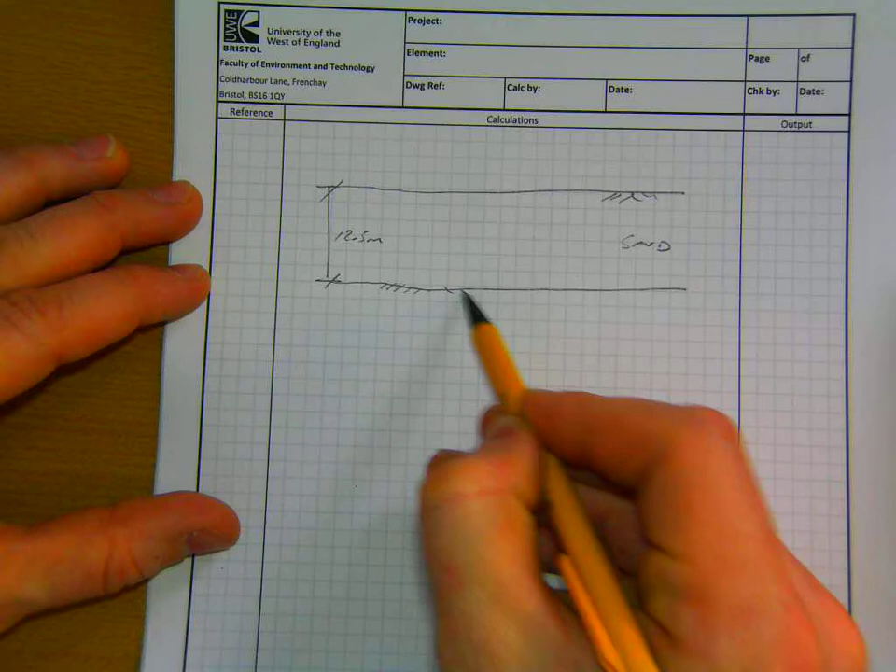So a well has been dug into the sand, and water's been pumped out at some kind of flow rate. The water table would have been higher, presumably up here somewhere. We draw it first, but then we read through where actually was the water table.

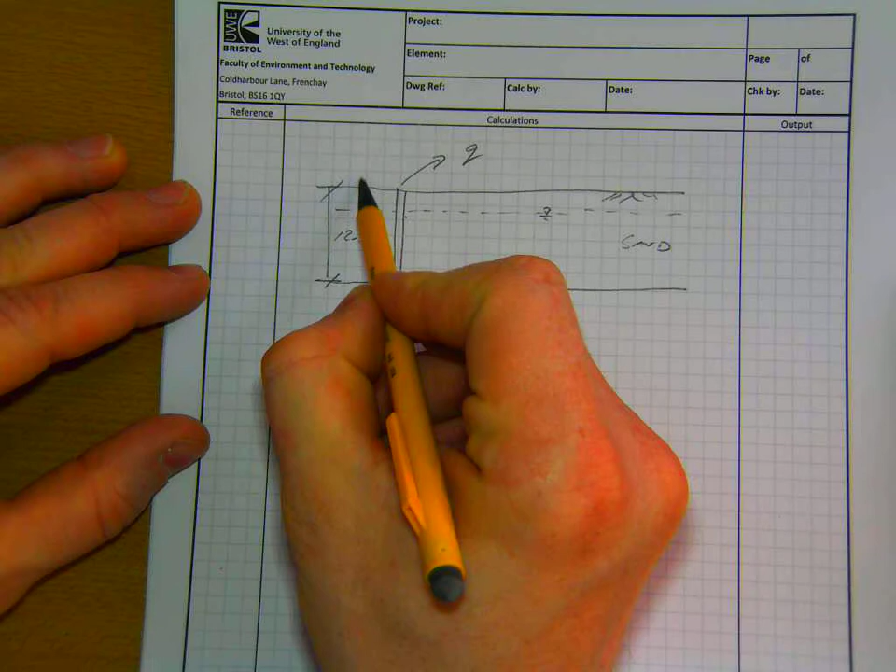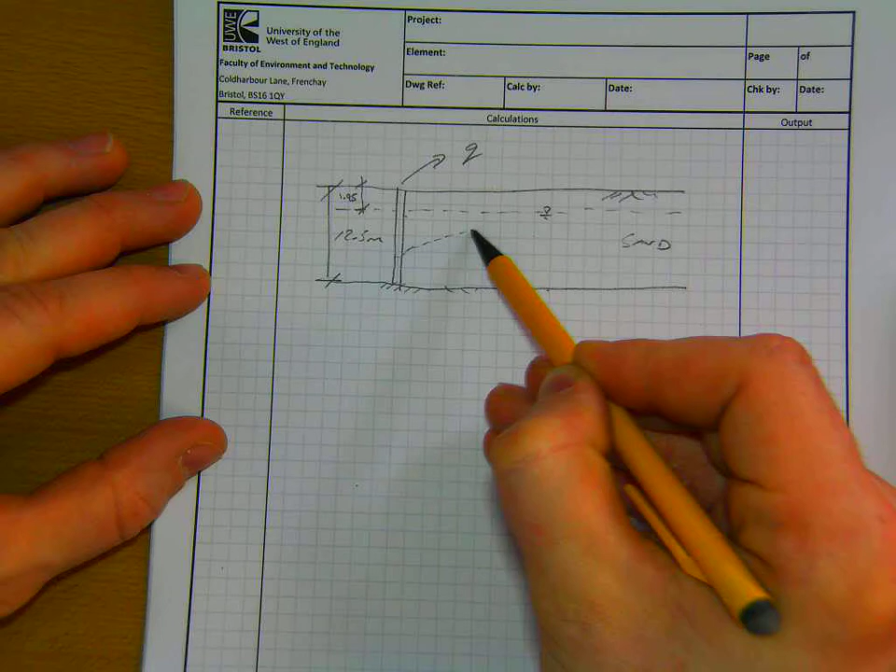It was 1.95 meters below ground level. So there was a particular period of time at the beginning when this water table was at 1.95 meters below ground level. Water's been extracted from this well, and over time that would have pulled the water table down to another level. We don't exactly know how far, but we'll read about that in a minute.

And so some observation wells have been dug. An observation well was put in here, for example, and then maybe another one here. And the water level would have been recorded in these at a depth.

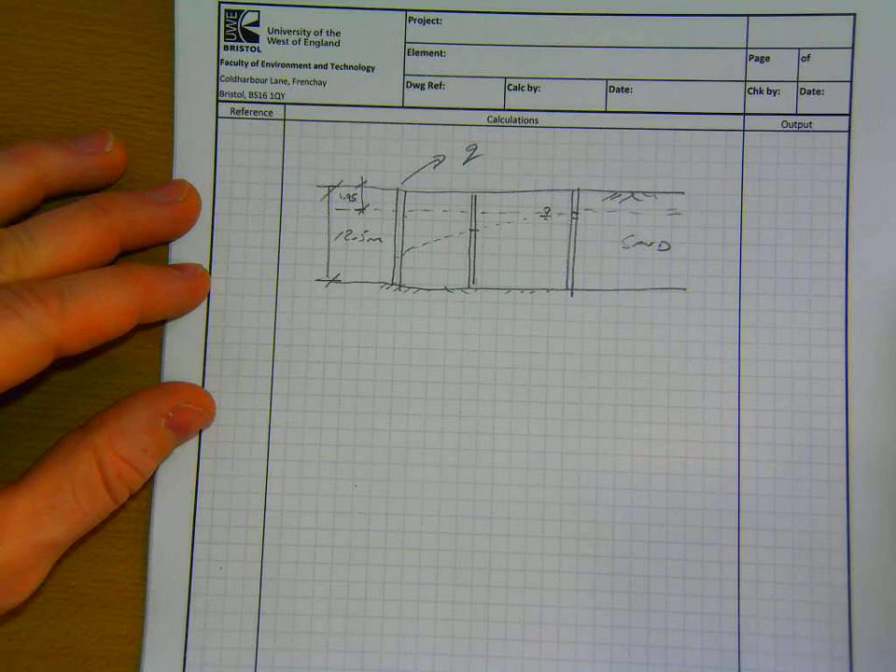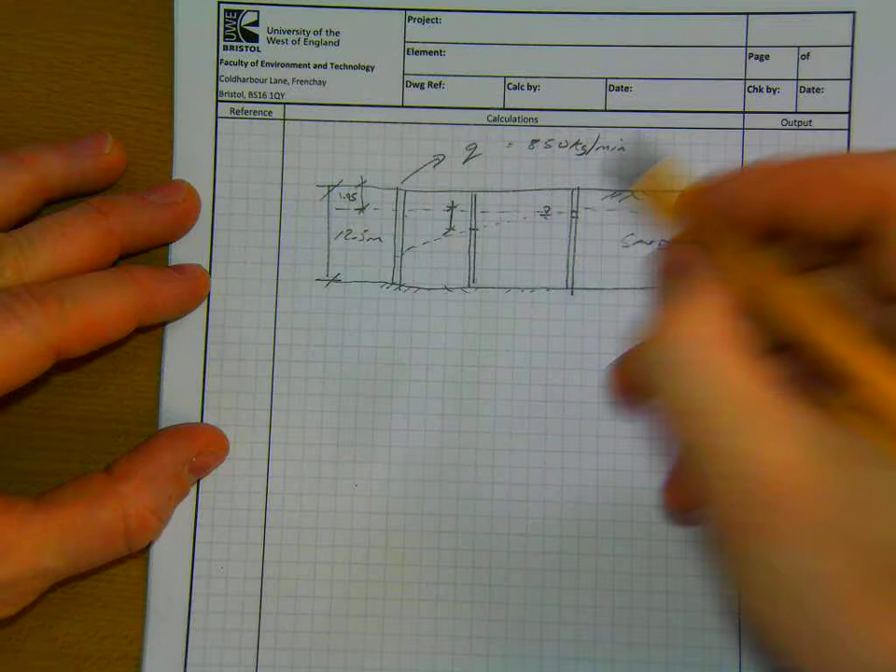We're told after some time the discharge was constant, and it was down to 850 kilograms per minute coming out of that well, and then the drawdowns, i.e. the amount it was drawn down by in these particular wells.

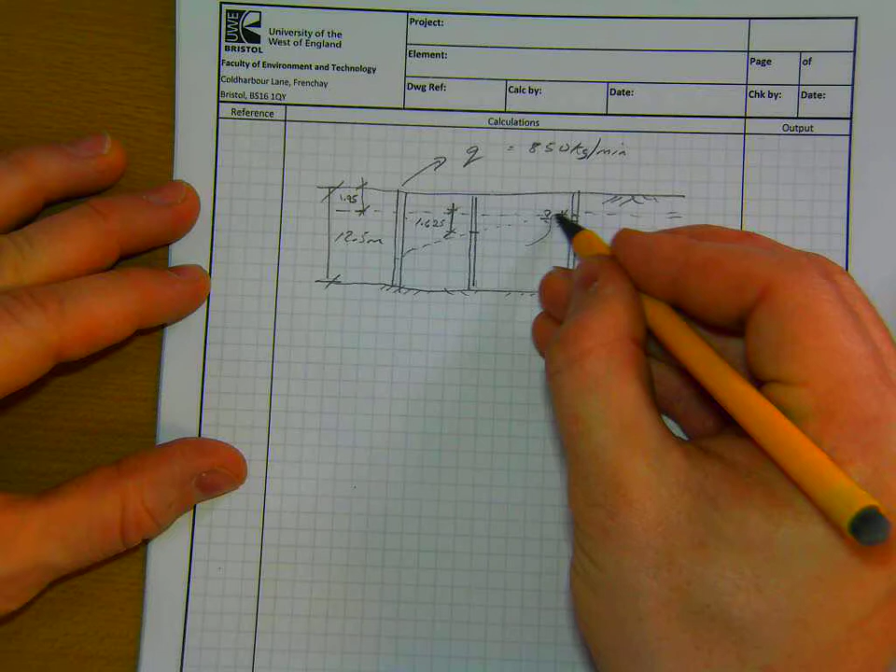It's going to get a little bit busy, this diagram here, but the drawdown, we'll call this one 1.625, and the drawdown in there was 1.36.

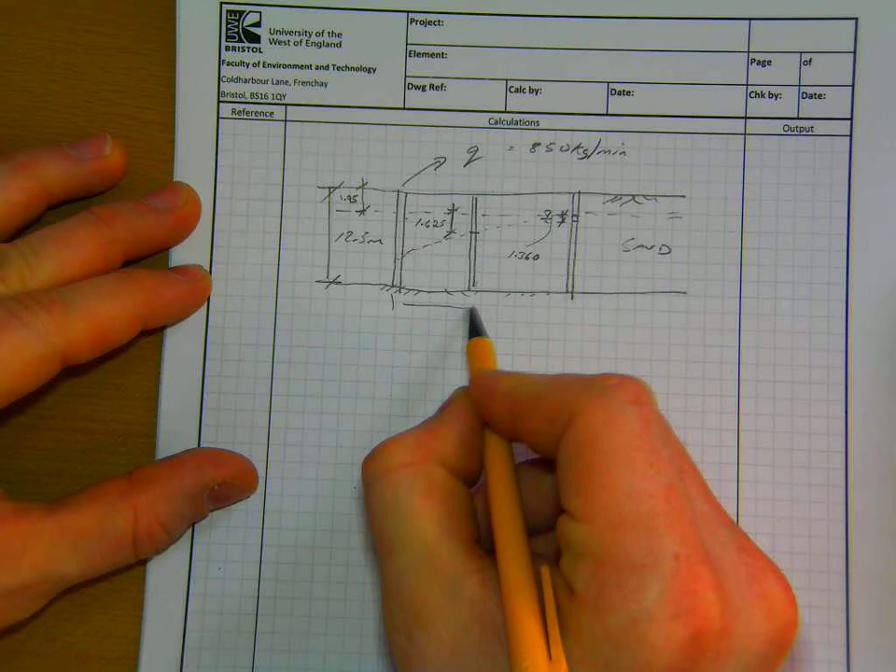We're also told what the distance is these wells are away from the original well, and they were at a distance of 15.2 meters and a distance of 30.4 meters.

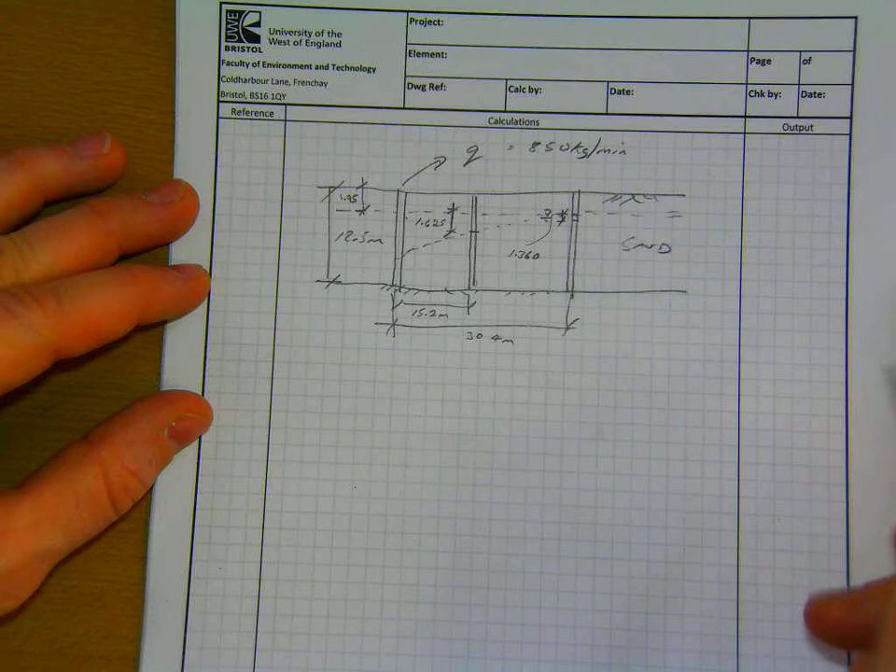And on this test, what we're trying to find out is what is the coefficient of permeability, K. And that's effectively a velocity, it's meters per second for the units. So there we have got all the information that we need to work it out.

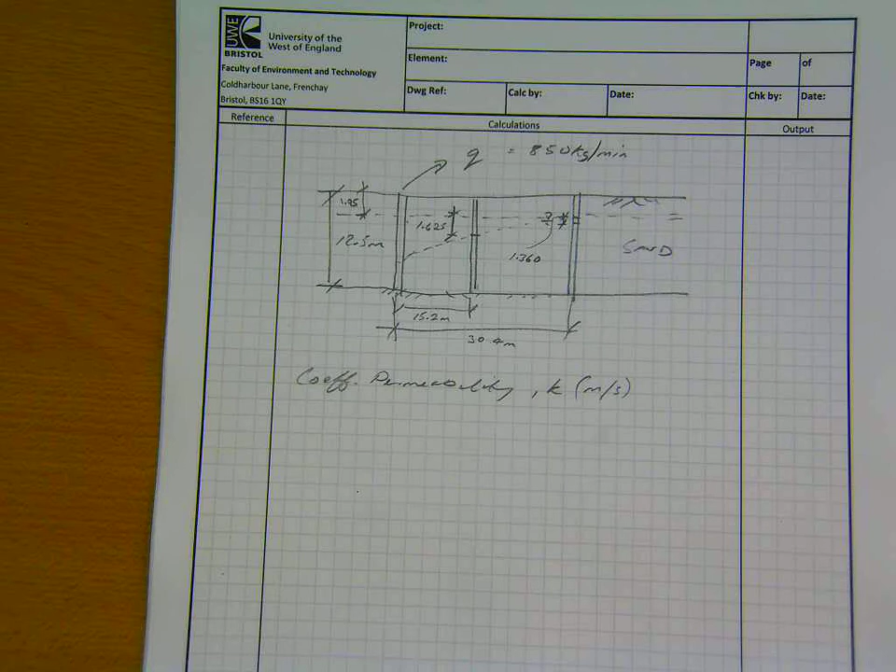Now if we go earlier on in the actual textbook itself and try to work out what the equation is for this, we would have to dig that out from the actual notes earlier in the textbook, and come up with a value for what K is.

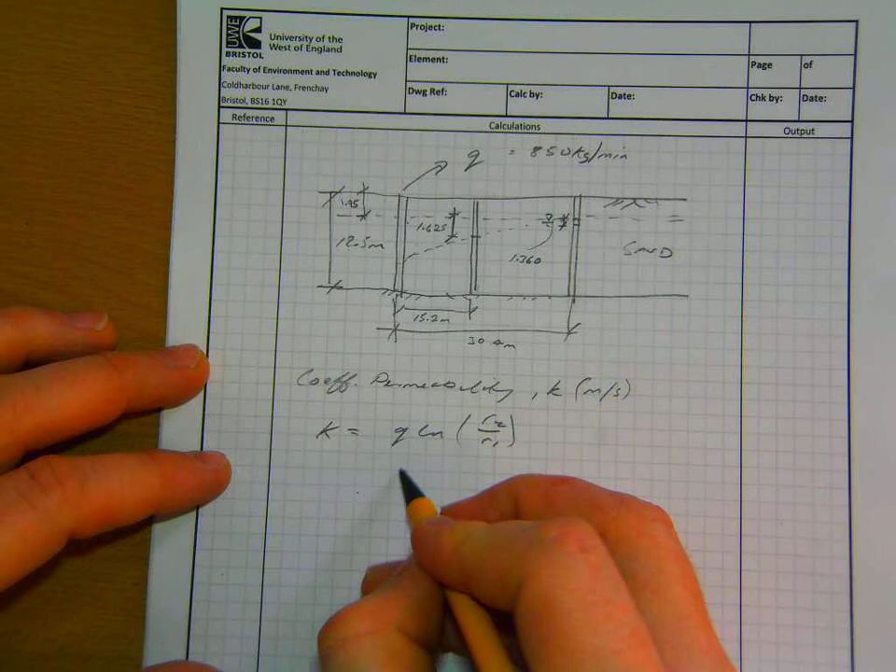To cut a long story short, the coefficient K is found by an equation with Q times the natural log of R2 over R1, all divided by pi times Z2 squared minus Z1 squared. That's the equation that we need to work with.

And so our job is just to find out what is Q. Well, Q is 850 kilograms per minute. That doesn't look like the sort of units that we like. Ultimately, we're going to want an answer in meters per second. So this needs to be converted to effectively how many cubic meters per second.

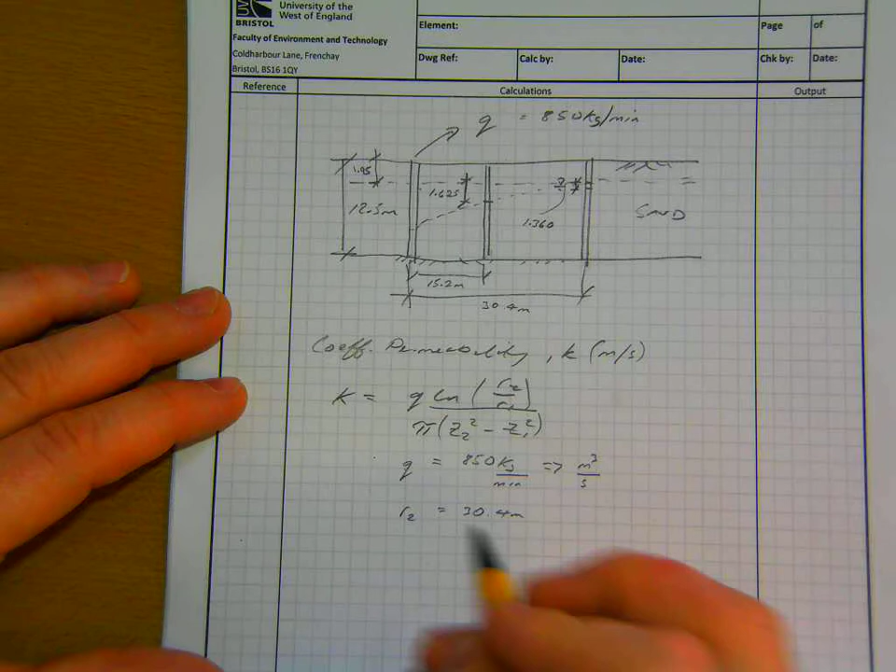That's a task we're going to have to do in a minute, I'll come back to that. R2, that's the radius, that's 30.4 meters. R1 is 15.2 meters. And then Z1 and Z2.

That represents, if you look at the diagram for this equation, Z1 is this distance here, and this here is Z2. So it's the distance from the impermeable boundary up to the drawdown water level.

So our original water table was 1.95 meters below the surface, and then we drew it down more. So the original water table would have been at 12.5 meters less 1.95. That would be the height of the water table originally.

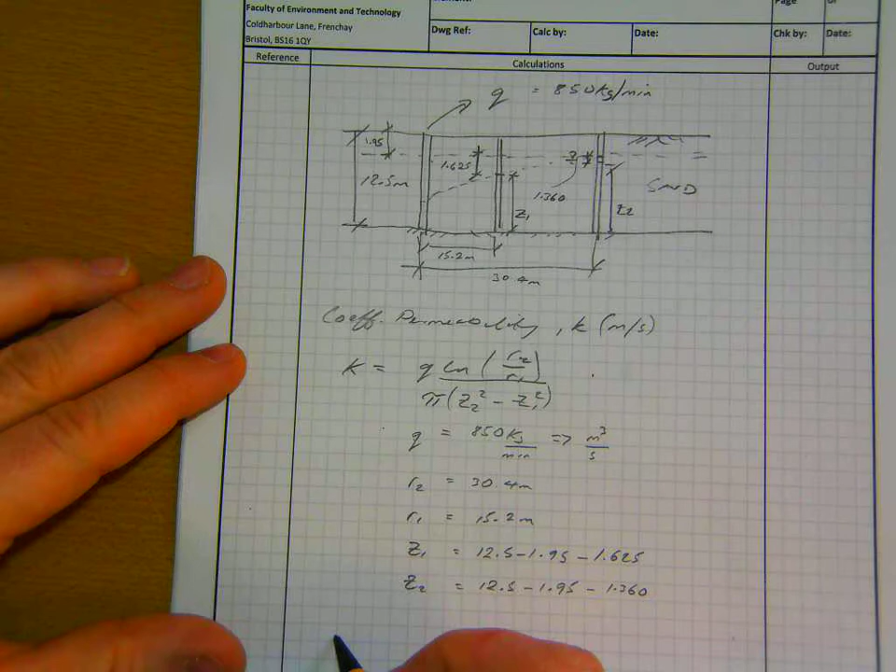And then we subtract from that a further 1.625. Same thing for 12.5 minus 1.95, original water table, and then we reduce from here 1.360. And so we've got here all the information that can then be plugged into that equation to find out what K is.

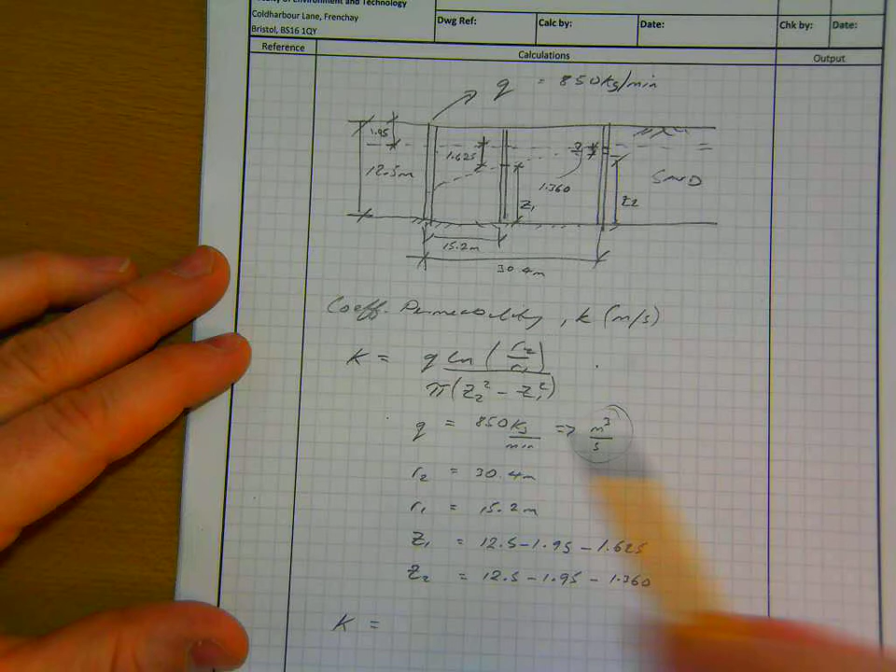And that bit really, we've done the hard bit. The rest of it is just simply plugging the right numbers into the calculator. There's a bit of issue regarding the units we need to be careful of, but apart from that, we're really on the straight run home.

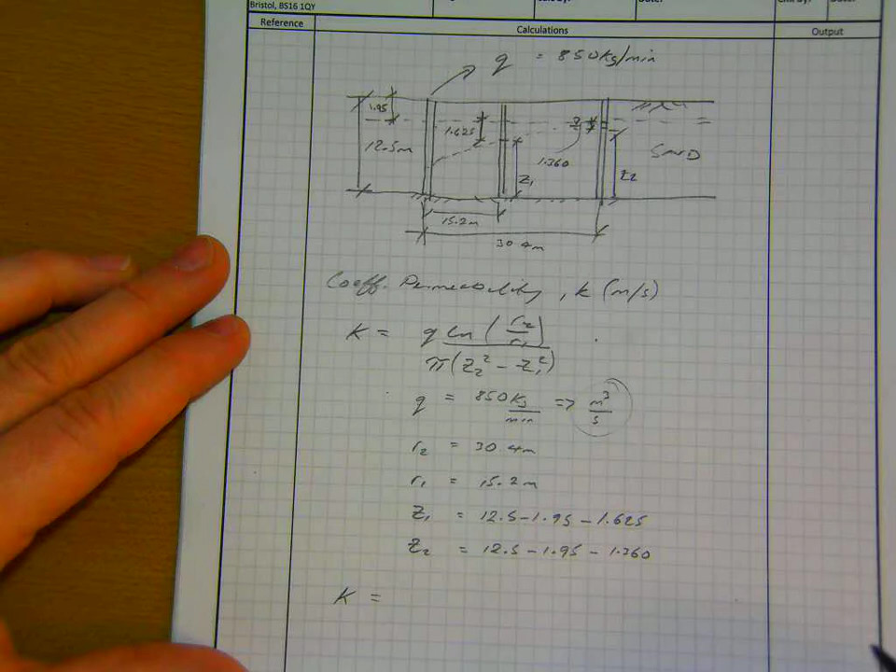I won't solve that for you. That's your job, but you should get the answer here in meters per second.

I think what we should even do before we start these sort of problems, or before we put the numbers in, is to estimate. What is the answer? What is an estimate before we even start? We know it's sand, and in Smith's book there's some tables of typical K values or permeabilities for sand, so we should guess to an order of magnitude before we start, and hopefully you'll get a number which comes out quite similar to the actual answer.

So good success with that, and I hope you get the right answer.